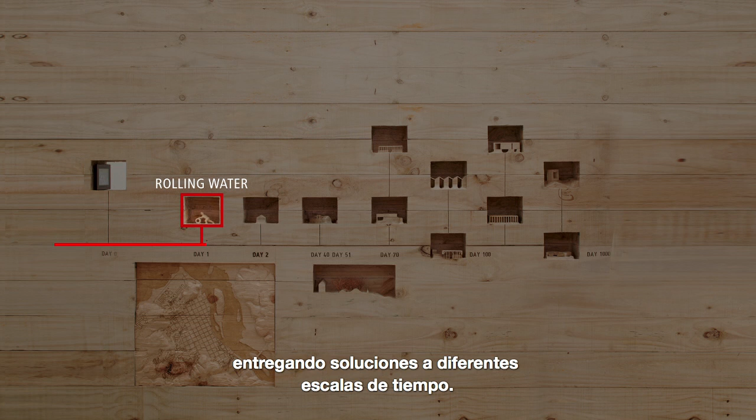Massive lootings and sackings of stores added huge social tension and a sense of insecurity to the collective fear of aftershocks and more waves. Elemental began to work right away, delivering solutions at different timescales. On day one, it was crucial to develop a more efficient system for water distribution.

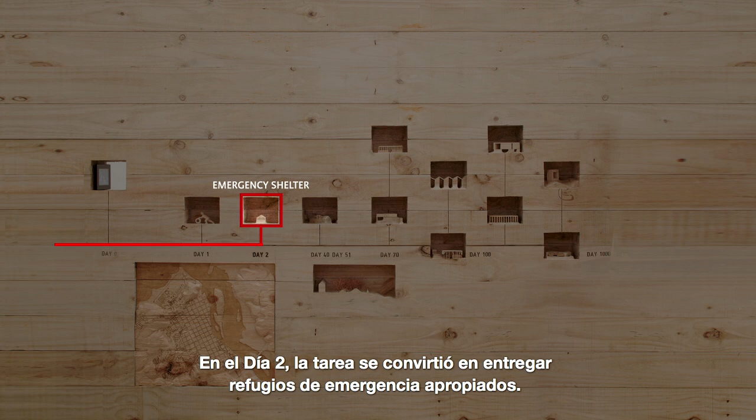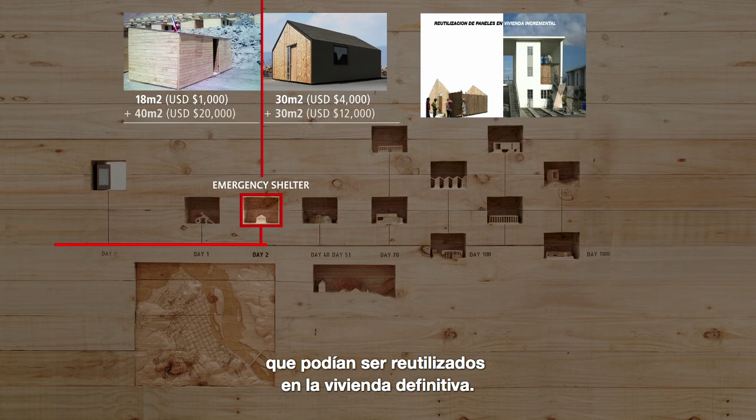On day two, the task shifted to deliver appropriate emergency shelters. We designed a 30 square meter insulated shelter with a set of panels that could be reused in the final housing solution. On day 30, we were called by forest company Arauco to get involved in Constitución, a 50,000 people city that was almost entirely destroyed.

When people came down from the hills, they found that almost 80% of the city was destroyed. There was no idea of how or where to start with the reconstruction. By day 40, an open house, a physical space in the main square of the city for deliberations about the reconstruction to be conducted in the most public and civic way, was already built.

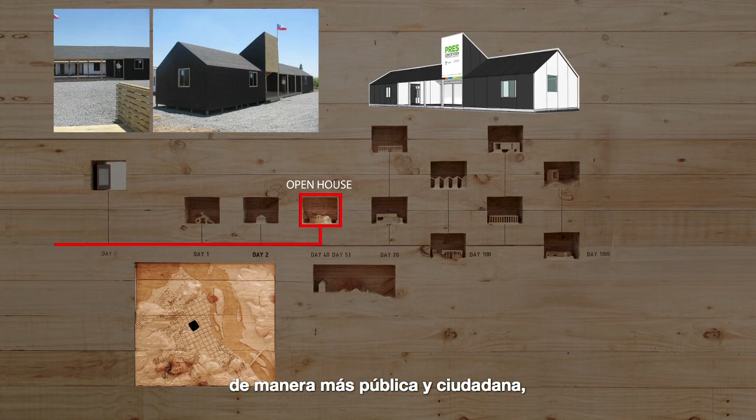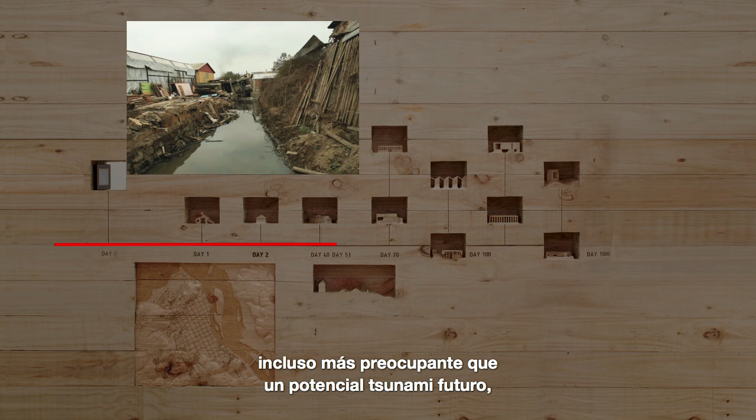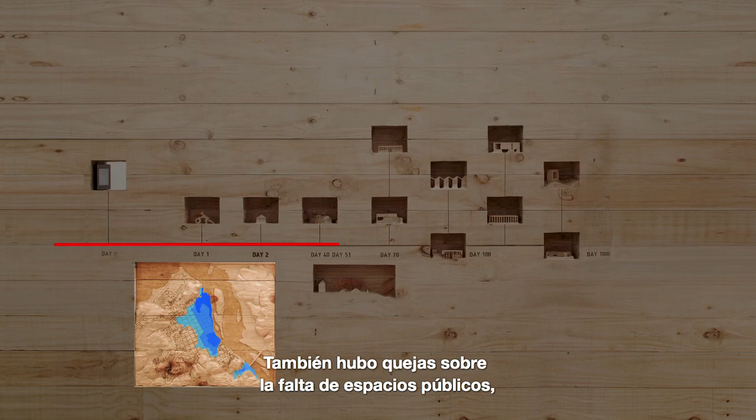We understood that for the people, even more disturbing than a potential future tsunami was the flooding that every single winter they had to suffer because of an inadequate city's drainage system. They also complained about the lack of public space, the traffic jams due to a narrow street grid, the disconnection between the city and the river, and many more.

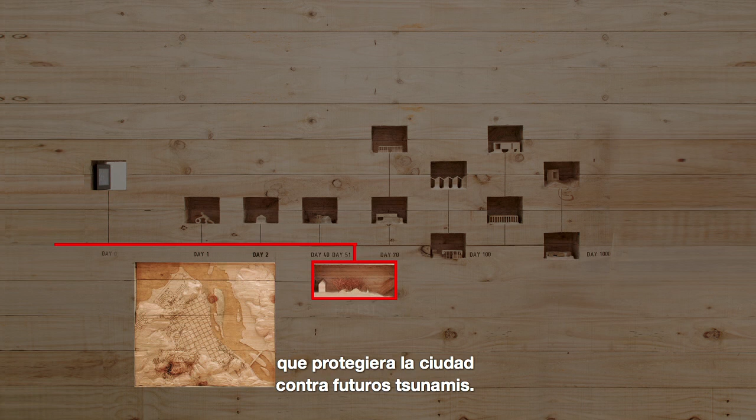Our proposal was to have a forest to protect the city against future tsunamis. But besides being an efficient mitigation device, it solved the problem of the flooding by laminating the rainwater. It also solved the historical debt in terms of public space, increasing it from 2 square meters to 7 square meters per inhabitant, providing democratic access to the river.

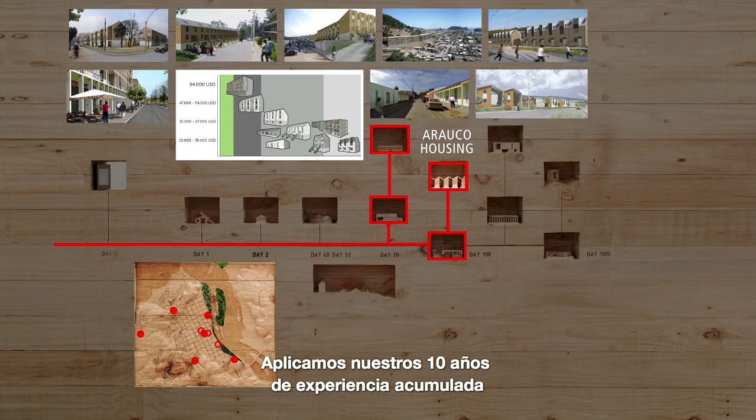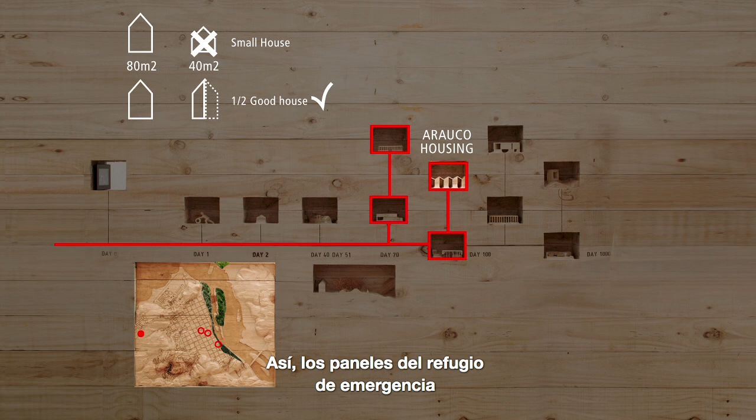We applied our 10 years accumulated experience in social housing. For example, instead of doing the conventional 40 square meter small house, we proposed that 40 square meters had to be seen as half of a good house, allowing people to complete them over time. This way, emergency shelter panels could be included in the units, allowing people to achieve a middle income standard rather quickly and at a low cost.

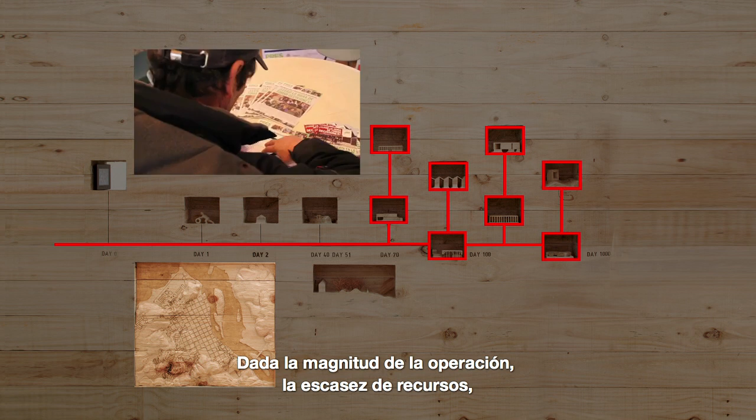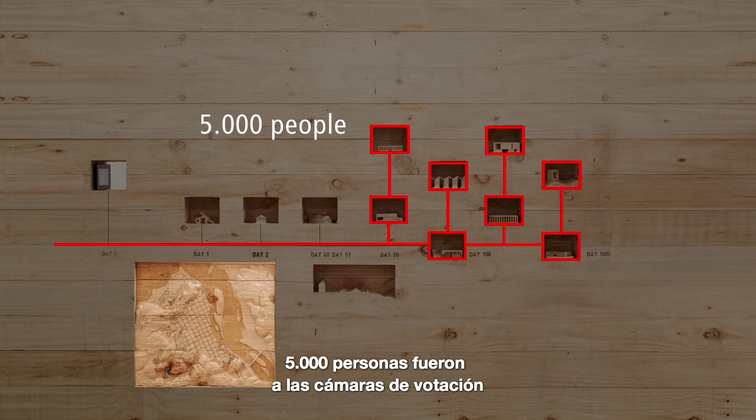Given the scale of the operation, the scarcity of resources and mainly the lack of time, on day 70, we asked the community to define the priority of problems to be addressed. In an exemplary civic act, 5,000 people went to the voting chambers and determined the buildings that had to be rebuilt first. 94% of the population was in favor of the expropriations to create a mitigation forest. Even the fishermen agreed to be expropriated. On day 100, we submitted the proposal to the President of Chile.

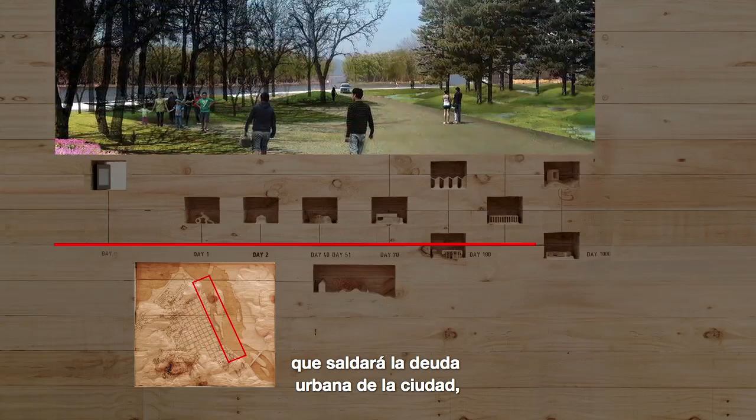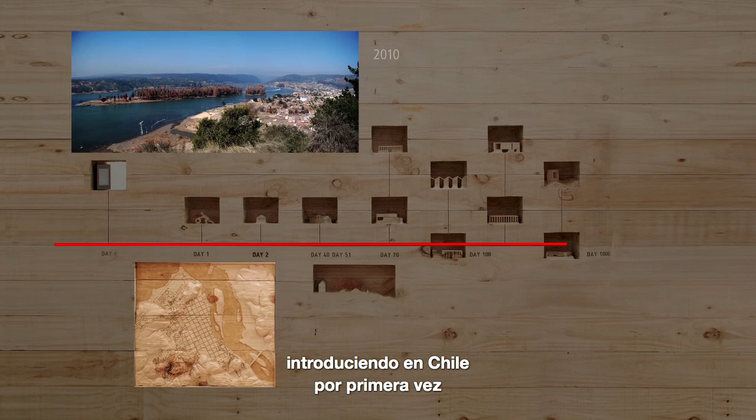We are now around 800 days away from the earthquake. Some of the projects may never be executed the way we proposed them, but it is a fact that the city will move its gravity center from the grid of streets to the river, to a new public space that will repair the urban debt of the city, that will solve the historic problem of the flooding due to rain, and that will simultaneously protect the city against future natural threats, introducing for the first time in Chilean history a new anti-tsunami urban DNA.